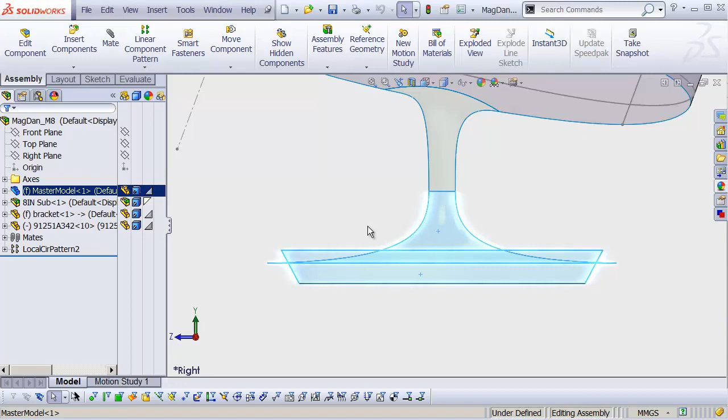Now let's build what will probably be the simplest part of our entire process here, and that's this base. Most likely this base would be cast and then machined in some way. It would be cast as a big heavy block that's close to the right shape, and then you'd turn it on a lathe to turn it down to exactly the right shape and finish that you want. At least that's what I'm envisioning in my head.

So to create that, first let's go to Insert Components, drop it down, say New Part, and then click on the front plane of our assembly to actually place that part in here, such that its front plane is coincident with the front plane of our assembly. Then it's going to create a sketch for us by default. I'm going to hit the red X to discard changes and exit, and then click on here to rename this part our base. It's in square brackets, so let's right-click that, save part in external file, and click OK.

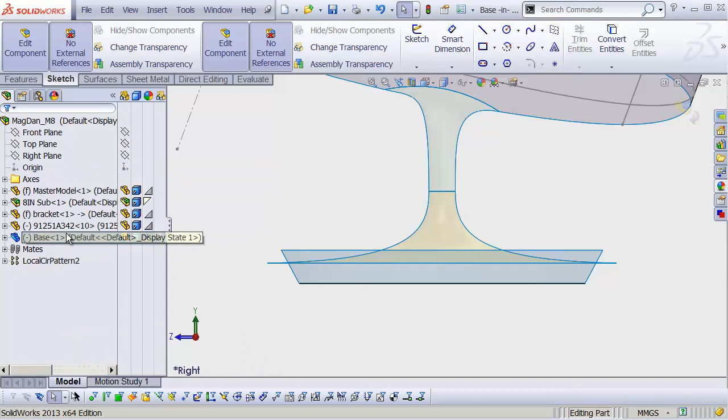So now we have a base file outside of our assembly. We'll right-click this and open it in a new window. Insert, Part. Once again, we're going to grab that master model and bring it in. And in this case, really all we need are the surface bodies, right? We actually don't need the unabsorbed sketches. Let's just click OK. And we're left with a very clean viewport.

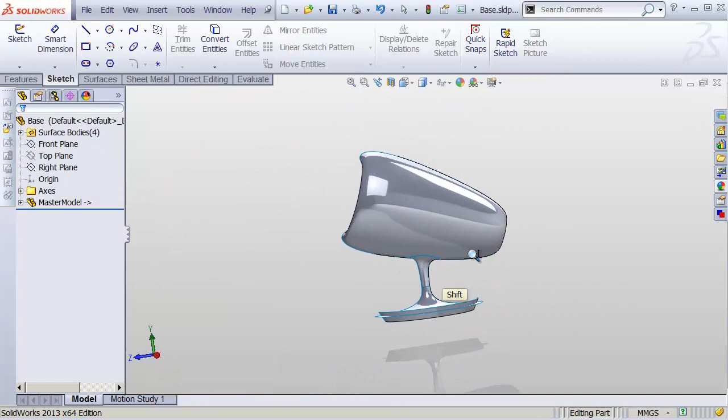All we have are surfaces. Let's expand our surface bodies here and just grab these two surface bodies that we don't need and go ahead and hit that delete key to create a delete body feature and hit OK. So we're left with just the two surfaces that we need.

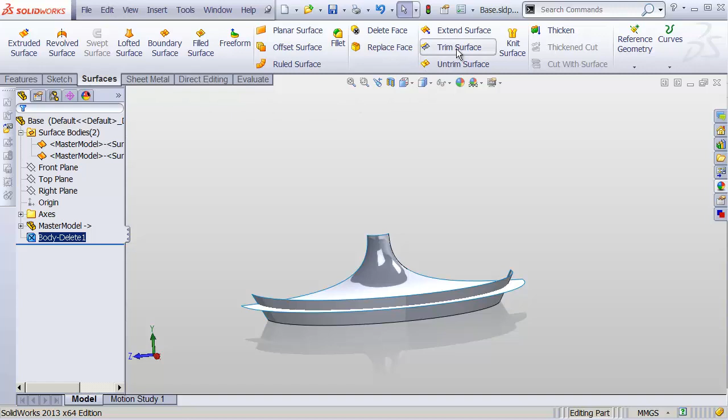And let's go to our surfaces, trim surface, and under mutual mode, let's clear that out. Click one surface, then the other. Make sure that keep selections is selected, and then head down to the next box and click on the two pieces that we want to keep. We'll hit OK, and we've now trimmed this down, which looks pretty darn good.

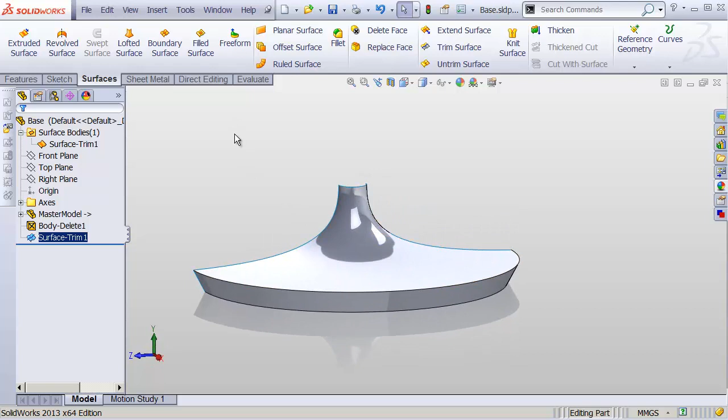Just fine with me. Next, let's go to our appearances and find those transparent appearances. I'll just grab a yellow one and make this thing yellow so we can see what's going on. You see we have black edges here where the surfaces are knit together, and blue edges on the outside edges, aka the naked edges if you're coming from Rhino. That's what they're called in Rhino.

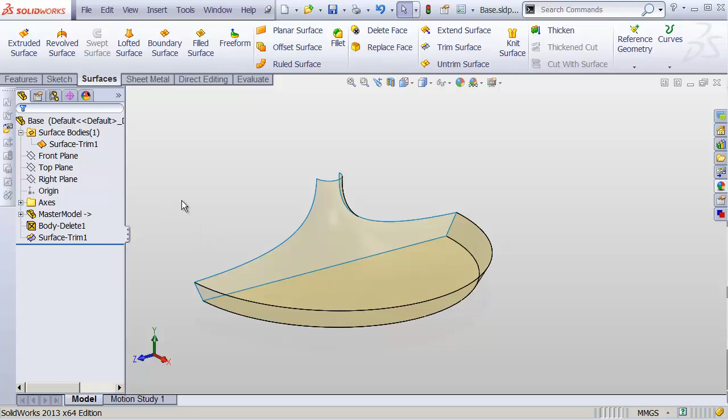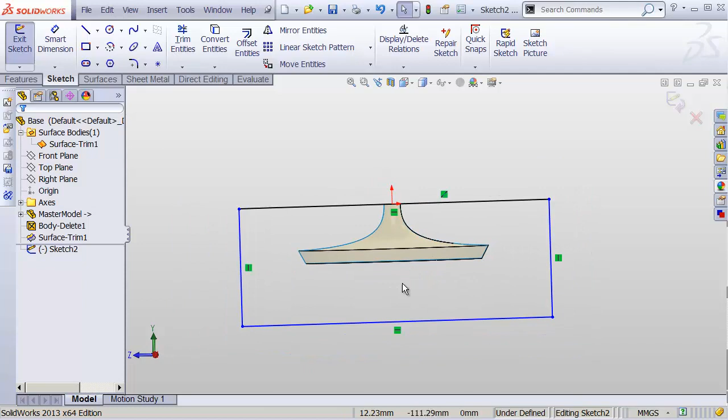And we want to make this into a solid, and there are lots of ways that we could do that. There's a way that I favor, and people always ask me why I favor it. Well, let's go to the right plane and create a sketch and demonstrate the way that I like to do this in general, if I have parts that are in draft, which in this case I do. And that is to create a rectangle that's bigger than my part. Doesn't matter how big. I'll take that top plane and make it collinear with the top edge of my box so that I'm sure that it's in exactly the right place. Just make it plenty bigger than my part.

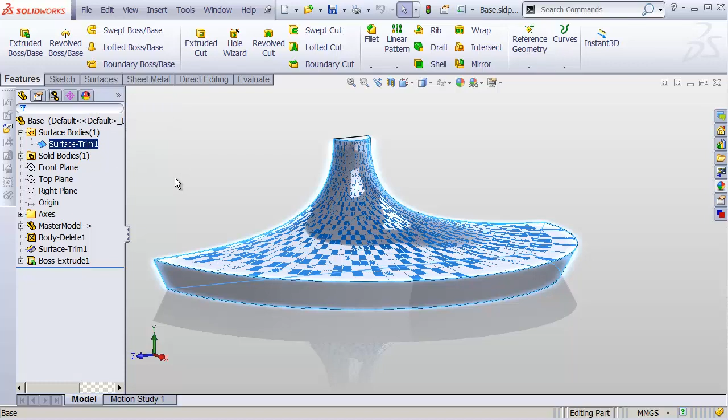Then head up to Features, Extrude Boss. Instead of Blind, I will say Up to Surface, click that surface, and hit OK. That fills in that area as a solid, but keeps that original surface body intact, and then I can hide that and get it out of the way.

Now, there are lots of advantages to working in this way. One of them is that I'm certain to be working in draft, and if I make any mistakes with my draft, put any undercuts without thinking, this will catch me and keep me from making that mistake. Another pragmatic benefit is that it lets me keep this surface body, whereas using thicken or other methods where I would create more surfaces and knit them wouldn't let me keep that surface body. It would consume the surface body. Anyway, there are a lot more advantages. We'll talk about those as they arise.

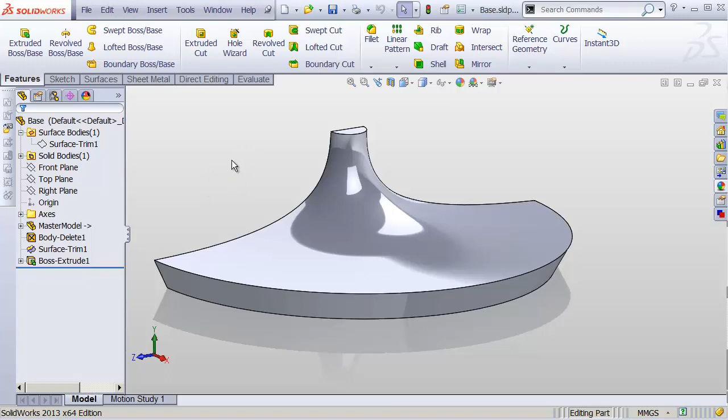I'll go to the Mirror tool and go to the right plane. And under Bodies to Mirror, choose that body we just created. Make sure that Merge Solids is checked down at the bottom, and then click OK. Then we're left with a full base, and I just need to make sure that this does not cut anyone because it is extremely sharp.

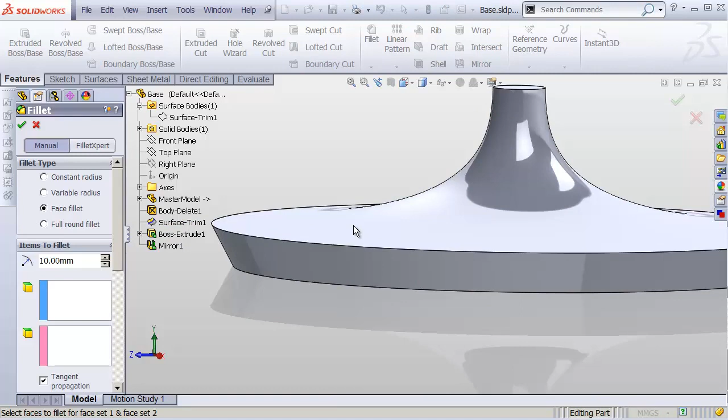Let's go to our Fillet tool. And in the fillet type, I'll choose Face Fillet. I'm going to do a 10mm fillet, choosing one face, and then the other face. That looks good. Then down in the fillet options below, choose Curvature Continuous, and click OK. That'll give us a nice, clean, rounded edge fillet.

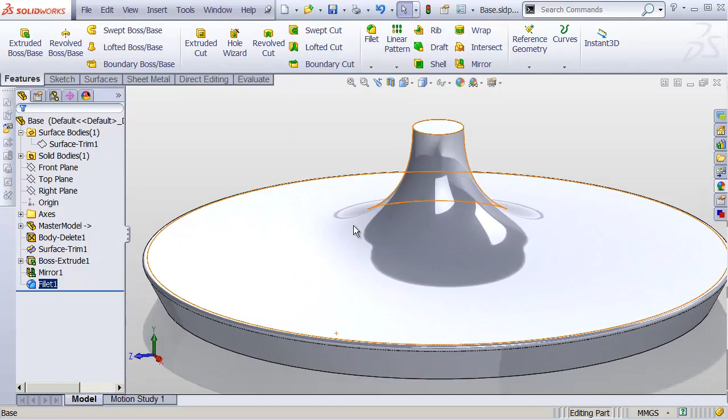Now up here on the top and bottom, we actually don't need anything quite so fancy. I'll just go to my constant radius fillet and put a 1mm fillet on both top and bottom just to make it look a little bit more realistic, a little bit more lifelike. And that's going to be just fine.

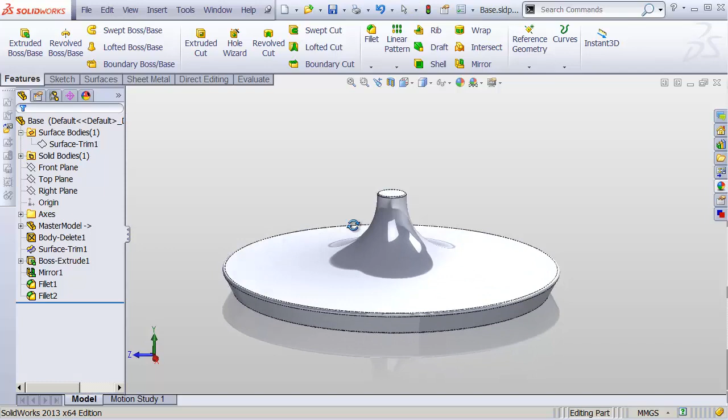Now in reality, we would probably have a threaded thing that would come up out of the top of this so that we could screw this into the rest of the base, the rest of the housing. But in this case, let's just leave it for now. We can add that kind of mechanical detail later on if we want to. We'll close this up, head back to our assembly, and let's start working on the rest of this thing.